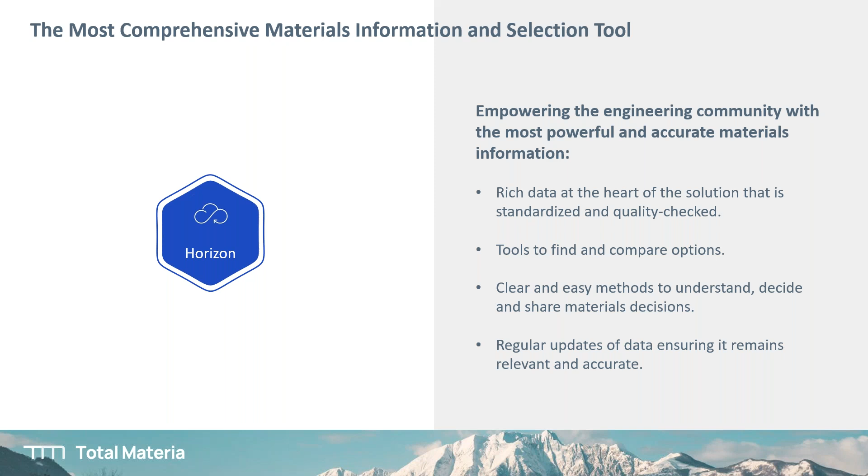You can find the equivalents of the materials across 80 different standards or producers and make clear decisions. Regular updates of data ensure it remains relevant and accurate. Global alternatives, reference data, and advanced properties will be provided.

Yeah, I was just answering a formability question from my user, and we have stress-strain curves, fatigue curves, a lot of advanced properties that you will be able to find, and approved reference data; create and share reports, material identification, 100,000, and we have a lot of

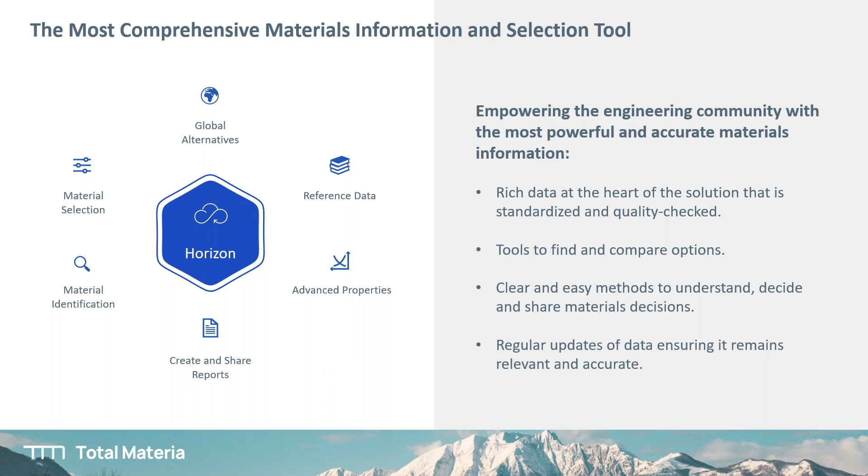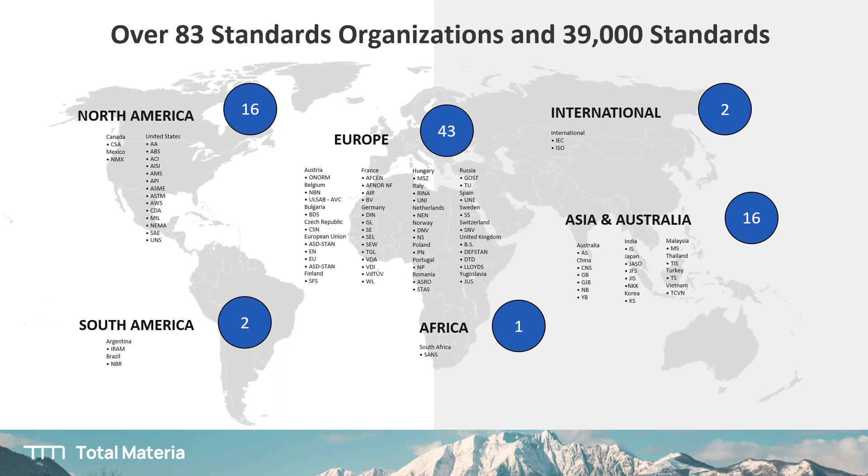the best material option, because it is covering over 80 standards organizations and 39,000 standards, especially for polymers, where you need a lot of different standards and a lot of different alternative materials. You will be able to find these materials according to their chemical composition and mechanical and physical properties, so you have a lot of alternatives and a lot of tools to compare and find the best local equivalent alternative material.

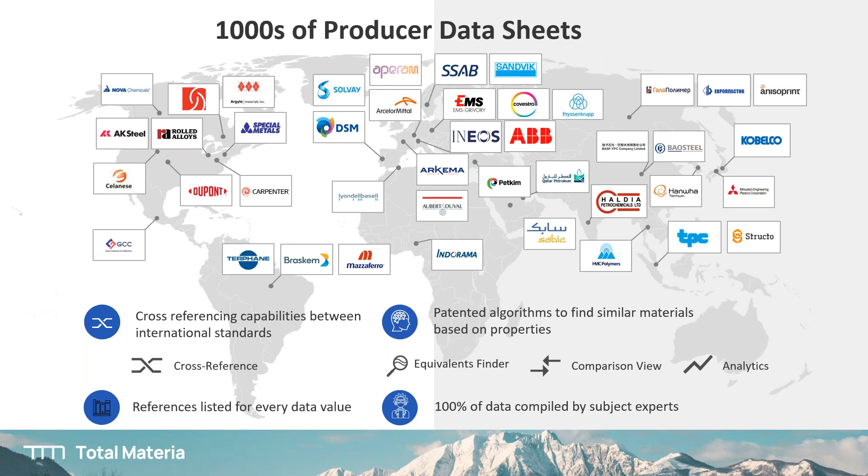This is how it looks. It is actually more and more user-friendly, updating every month, and each month our IT team is preparing some surprises for the users. It gets easier to use the Total Materia platform. And still, if you're struggling to find the information that you're looking for, you can always ask for technical support or free of charge training. Whatever you want to see, you can send your suggestions for us to develop the platform to be more user friendly.

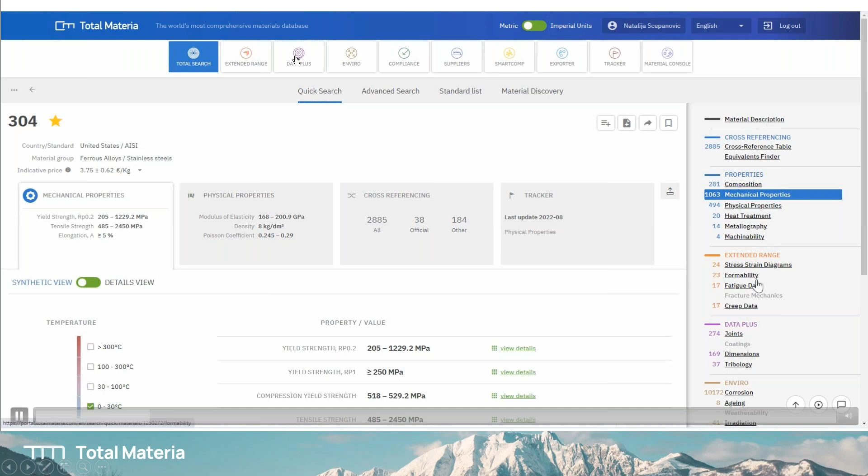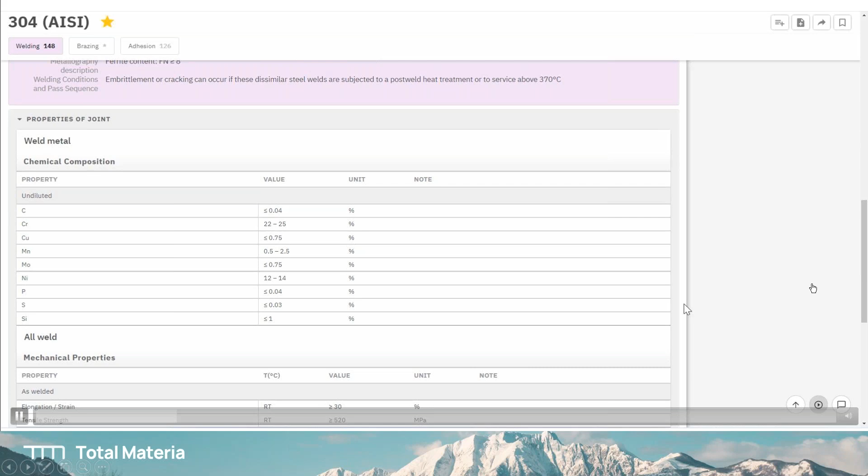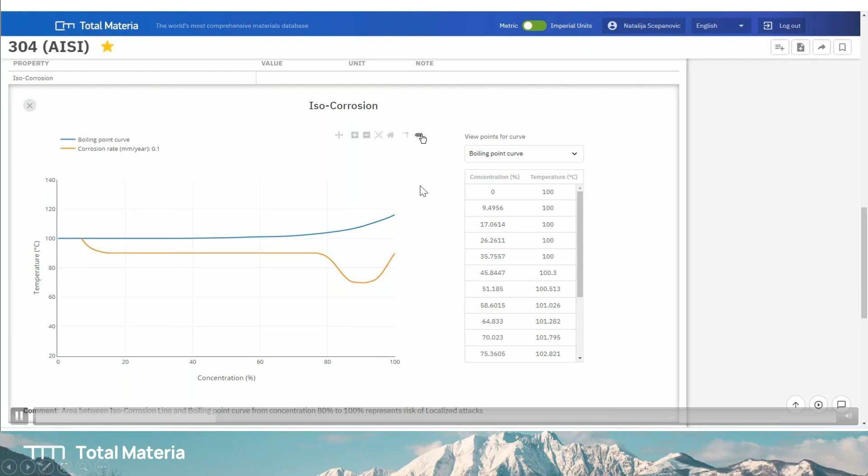This is the material card, for instance. On the right hand side, you can find mechanical and physical properties, supply information, a lot of stress-strain curves, joints information, chemical composition of the joints or mechanical properties, of course stress-life parameters, strain-life parameters, and as you can see, a lot of graphs, stress levels, iso-corrosion test results of the material, and temperature dependence information.

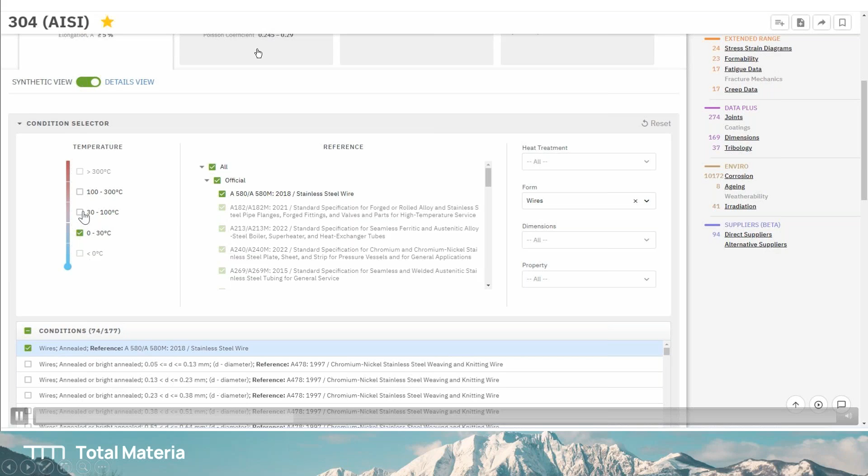All this material information from different standards is constantly updating; as I recently mentioned, every month we're looking for new materials and new material information. It is a very, very critical part of Total Materia. It makes the difference actually. The same material with a different heat treatment or different form will give you different mechanical or physical properties that you'll be able to find in Total Materia. That makes a huge difference for your estimations.

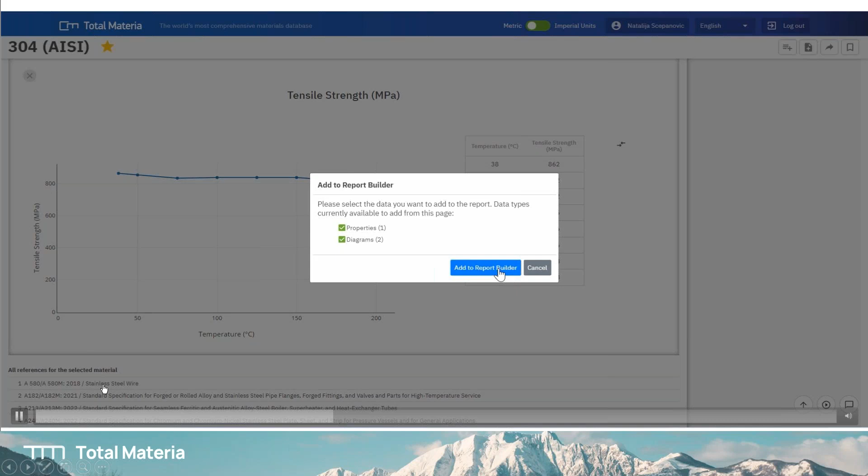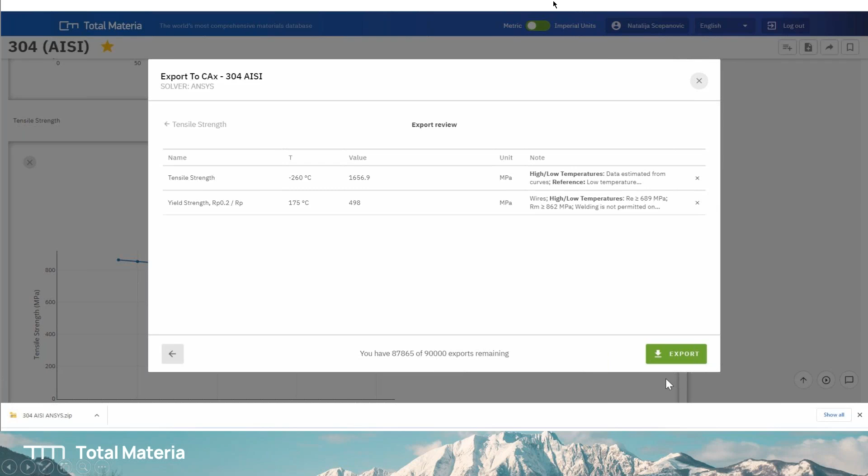As you can see, all references are below the material information, and you can compare the graphs. You can compare materials, and the same materials in different forms and different heat treated options. And with one click, for 28 different simulation tools, you can export these material cards and use this material information in your simulation software.

Here's where you can find alternative cross references of the material: identical, official, 100% same chemical composition, other sources, implicit materials, or Smart Cross will still help you to find the equivalent material. Here in the example, 304 standard material, cross referenced to Chinese GB standard material, as you can see the S30408 named material, or you can see different designations of the same material. We have 10 different alternatives.

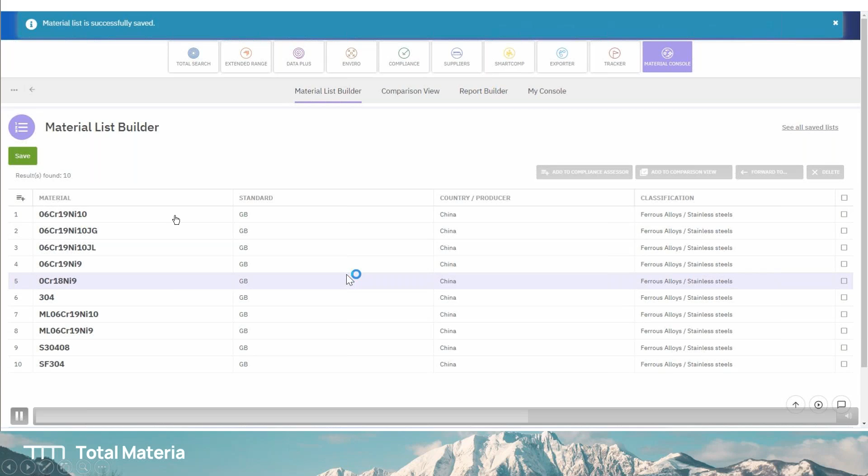We can create a material list of GB equivalents of 304, so you will be able to find which one of these materials has the best price according to your design. You can use these alternative materials.

Without hesitating, advanced search will give you another option. When you have a material, material to design is a different workflow, but when you have a design, you know the physical properties and mechanical durability information of this material, so you can make a search. You can add so many criteria here: yield strength, minimal tensile strength, impact strength, modulus of elasticity value that you want to have minimum in this material, so you can filter 500,000 down to 19. Now you have 19 alternative materials to use.

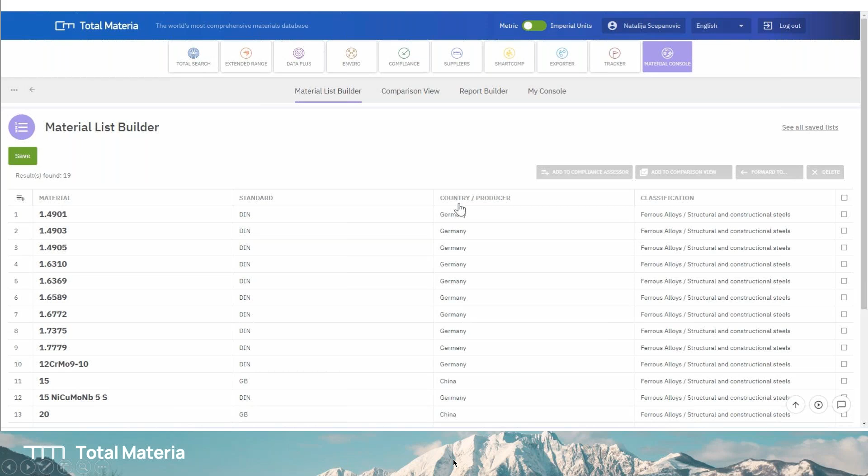Still, you can keep comparing these materials to see which one of these materials is the most suitable one for your design. It's very easy to use, and you can compare the materials side by side.

Of course, we have a question already. Can we use stress-strain directly in CAE? Of course, in the simulation softwares, there are stress-strain curves that you can add. I would like to show you maybe an example when I finish all this presentation, I will show you the details, because yes, we are connected to design and simulation, delivering reliable approved materials information to your simulation softwares. That makes the difference compared to generic material information.

You can combine with your PLM systems and sustainability tools; we are supporting right now 28 different formats, which means when you export this material card, I will show you actually, that material card will be able to be read by ANSYS or CATIA or Siemens NX or SolidWorks. And I would like to show you more detailed information about tools and integration to support your team.

Total Materia is not only for material specialists. This is also a very important tool for supply chain, and simulation specialists will be able to use all these material cards with confidence in your simulation softwares. And at manufacturing, you have a lot of detailed data, and the quality department will be able to control the material, if it's the right material that you purchased.

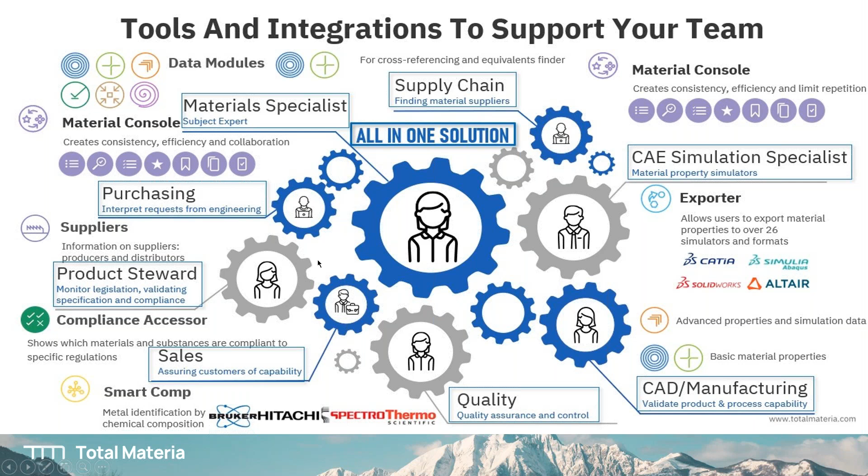And sales departments still have a lot of information about the material and the product, and the product steward will be able to know how to produce this material, for instance, mobility information, stress-strain curves, and so many details. And the department will always have more alternative information for different materials, different suppliers, different price information. Before we move to integrator, maybe it will be nice to show you the question that you asked.

The platform is remembering me. I'm just choosing a random material here, plus you can use the platform in different languages, any language you want. Let me show you an example. For instance, let's move to Romanian language. The whole platform will change to Romanian. Let's move to another language, Indian. The whole platform will change to Indian, let's say, or Thai, or any language you want. As you can see, this is the first option that you should consider, that it's easier to use your own language.

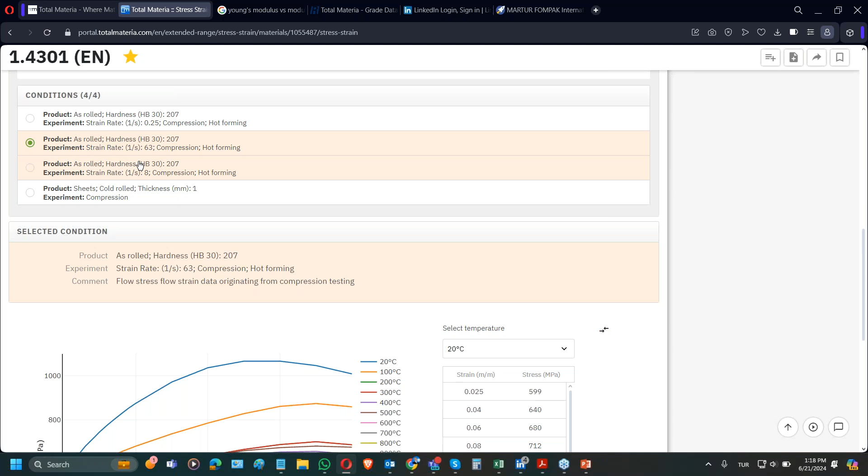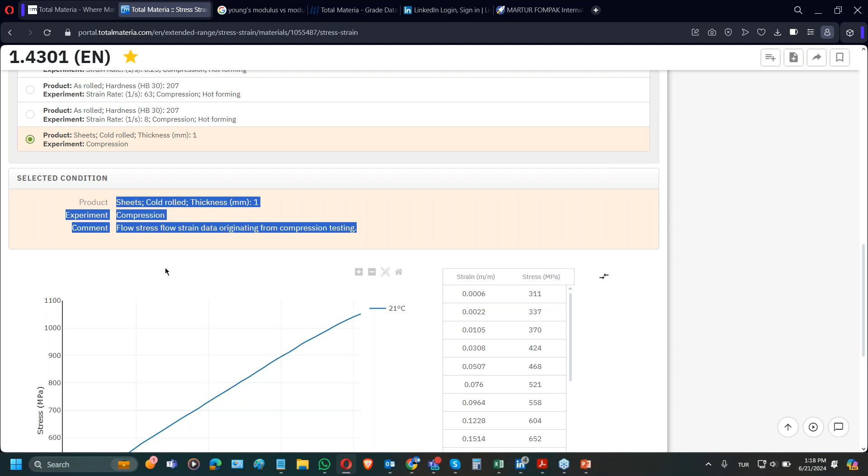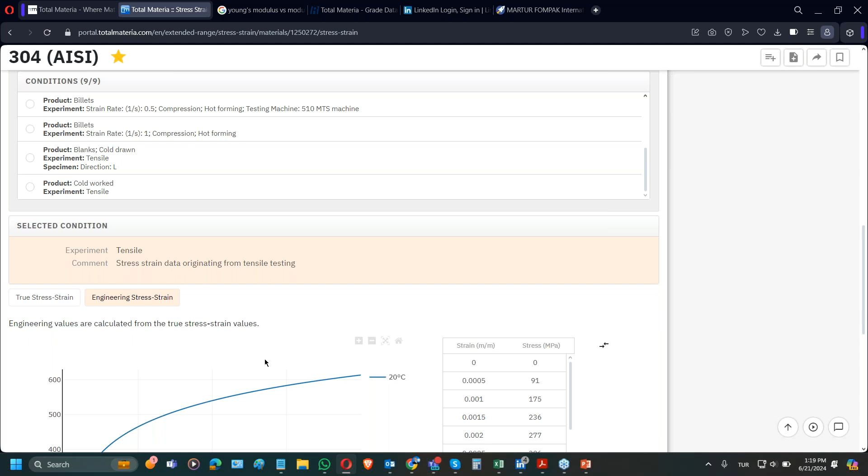And when I click material here, what you said, if we have any option to export the stress-strain curves, we have for this material, for instance, 4 different stress-strain curves. Sometimes some of our users are asking if this is engineering stress-strain or true stress-strain. These are 2 true stress-strains. If we have engineering stress-strain, we will always have the option here. I will give you another example, excuse me. And here you can see a lot of different stress-strain curves. We have true stress-strain by default always. And if we have engineering stress-strain, you're clicking and choosing the engineering stress-strain.

Still, you can copy this file, or let's say you want to export this file, all you need is to click here, export to simulation softwares. I hope you can see my platform, and you can choose Excel format, and when you choose them all, you have all. If you want only stress-strain diagrams, for instance, or modulus of elasticity, as an Excel file, in the next step you're choosing the right conditions. You can type here, let's say, sheet metal that you're looking for.

Maybe it will filter to 5, and you have to know that in military handbook references, we have 4, 5 different sheet metal options here. Okay, and all 12 references for this material give you different references. You're choosing one and then moving to the next step. You want to choose the stress-strain diagrams. All right, so when you choose it, you're moving next. But if this stress-strain is not the one that you're looking for, because it gives you whole details about the billets and product, you see the details, blanks, cold drawn, cold worked. You're just selecting the one you choose and moving to the next step.

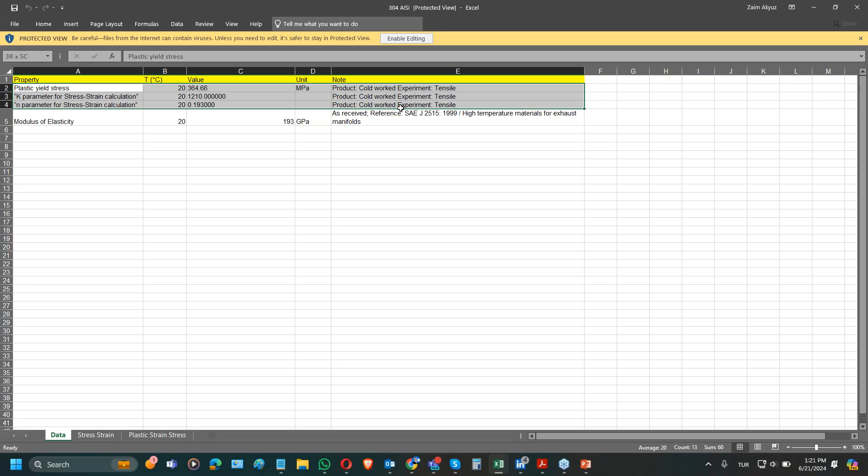And it gives you plastic stress-strain, plastic yield stress, and all these details you will be able to export as an Excel file, because we chose to export as an Excel file, remember. So this one will give you all these details, information for modulus of elasticity, stress-strain curves, and plastic stress-strain. See? So in case we want to export this data, the simulation software that you're using could be ANSYS. See, fatigue life, stress-strain diagrams only, let's say, or you can choose them all, of course.

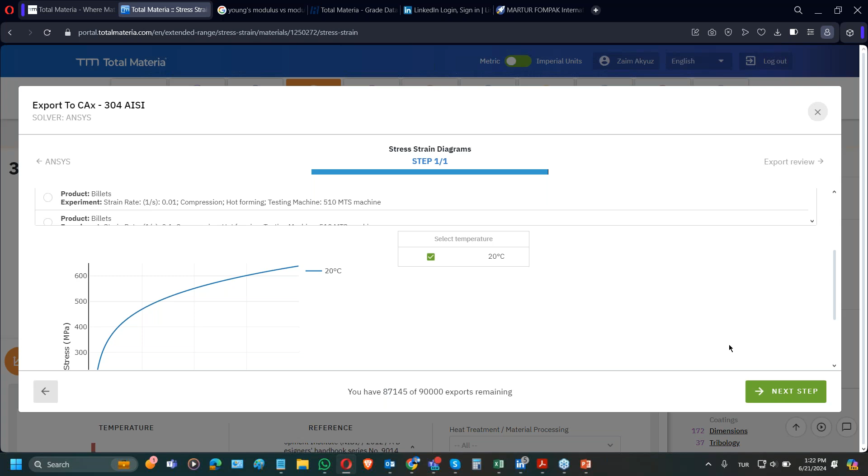And when I export this file, it will be able to be imported by ANSYS because it is going to be the XML file which ANSYS can read. And let's choose another one. Let's say LS-DYNA, okay, and yield strain information, and then this can be exported in MAT format.

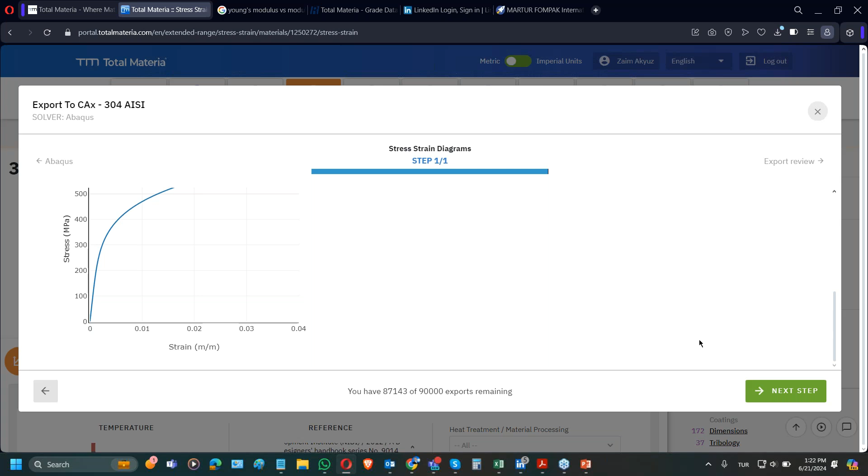See the difference? So whatever simulation you're using, it doesn't matter. It always gives you the right format for your simulation to read it. INP format, as you can see, for Abaqus. Still, we have 26 different options that you can choose from the list, either export as an Excel or XML file, or you're just basically choosing the right simulation that you want to use.

Simple as this. And we have formability information, high strain curves, formability first, bendability information, R factors, plus we're providing fatigue information. These are also very, very important. And strain life, stress life parameters. This is very important, the heat treatment of this material and the form of this material, specimen for the test, direction and loading conditions and stress ratio, especially high strain rates or cyclic fatigue data that you will be able to find.

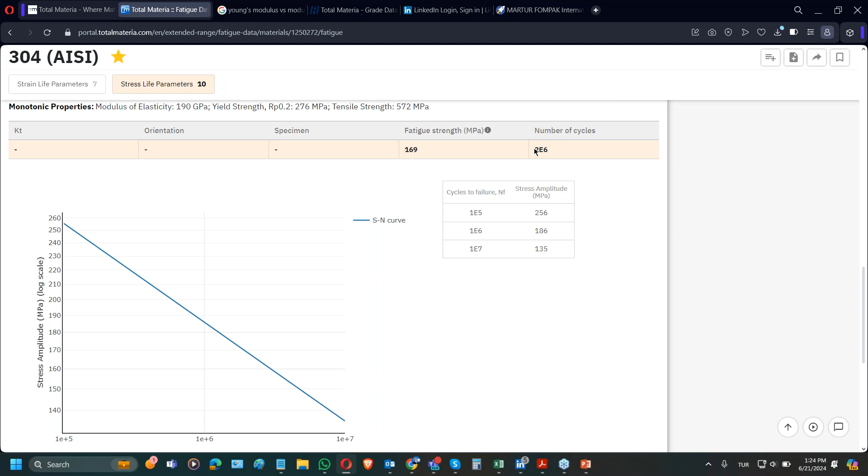Number of cycles, see, it's very valuable information. And here's the reference. And here is the product detail, experiment detail, and comments. The fatigue strength is obtained from strain life data at long life. This is a lot of information for thousands of materials. We have creep data. Okay, you want to join this material.

Welding, brazing, additional information, welding method, you're choosing the filter because we have a lot of welding information. Like, okay, I'm randomly choosing one and it's decreasing to 13 different options. Still, I have different electrode options according to the chemical composition or the mechanical properties that I want to achieve. You see, and with one click, you can have electrode information here. And if you want to keep searching, with one click, you're going back.

You can choose boiler alternatives and weld alternatives and 304 SAE. See, we have a lot of information for a lot of materials, dimensions and tolerances. These are very, very critical information. As you can see, once you click here, you'll be able to get all these dimensions and tolerances, information about strain, flaring test requirements, flange requirements, permitted variations. You see a lot of detailed information for suppliers and material that you want to purchase.

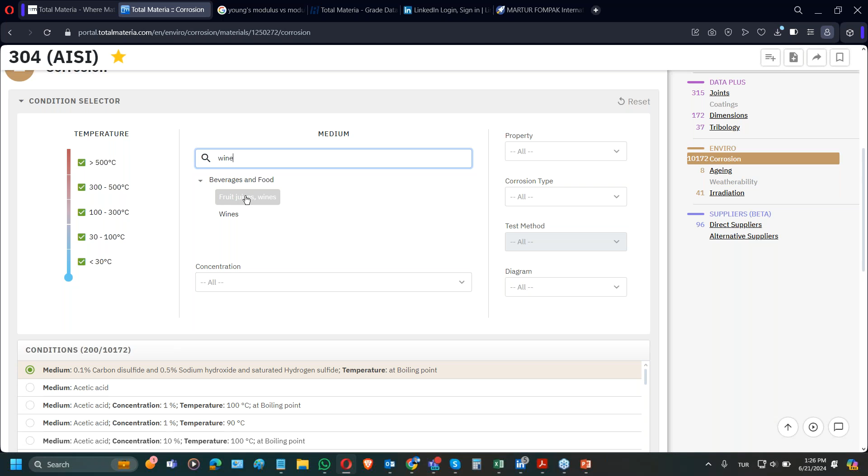And still, it's not just like that. We have tribologic information here. As you can see, 37 different tribologic conditions for this material. And corrosion information, 10,172 corrosion tests have been made for this material. So the property you want to choose, or just say salt water test, or sea water, or acid, or ketchup, or wine corrosion. Yeah, still we have fruit juice and wine corrosion tests of this material. We see 10,000 corrosion tests.

Aging information, when this material will lose its mechanical or physical conditions, irradiation, and if there's weatherability information, we'll put it here. And we have 96 different supplier alternatives. You need to choose the country that you're living in, and you'll be able to get the information where you can find this material. Okay, this is 304 from the United States. We are not living in the United States. Let's say we are in Europe or Asia. We want to see the same material alternatives.

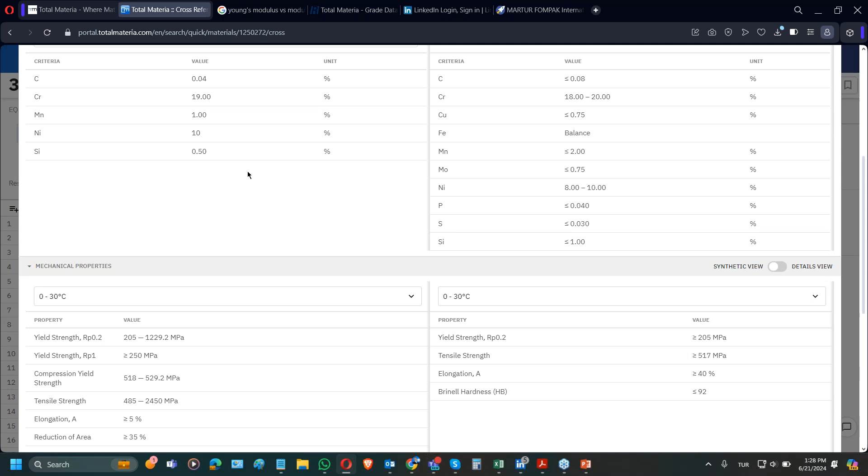Either we would like to go for specific proprietary information, like which producers are producing the same material as the 304 standard material. And this is the proprietary. Ulbrich Stainless Steels and Special Metals Incorporated is producing the same material. With one click, as you can see, we can compare the chemical composition, mechanical properties, and the physical properties of the material. We can save as a PDF with one click. See, so we can find alternatives.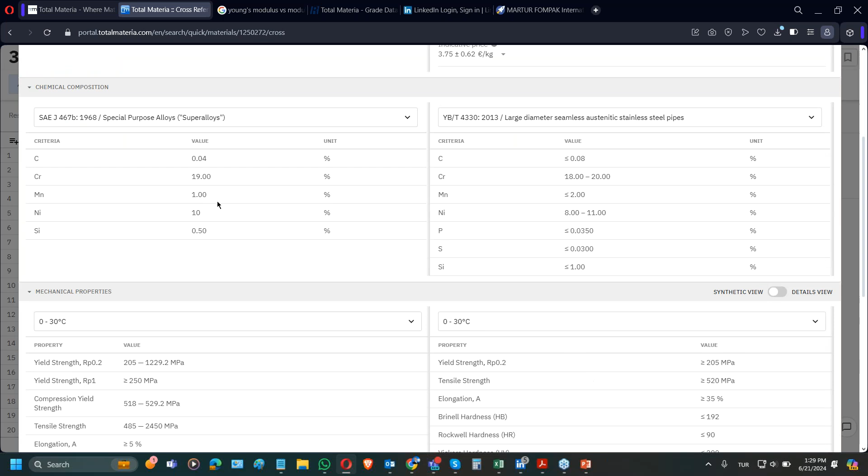We see the chemical compositions are 100% the same. And mechanical properties, yield strength, for instance, have the same value, and physical properties, and we can save this information to share with your suppliers, your manager. And the last update came for this material in April 2024. This is an example of how generally to use this material information.

But well, we have chemical composition, mechanical properties, 1,000 mechanical properties of this material. That means at elevated temperature, you have different mechanical properties, or if it's in minus, of course, you have different mechanical properties, as you can see.

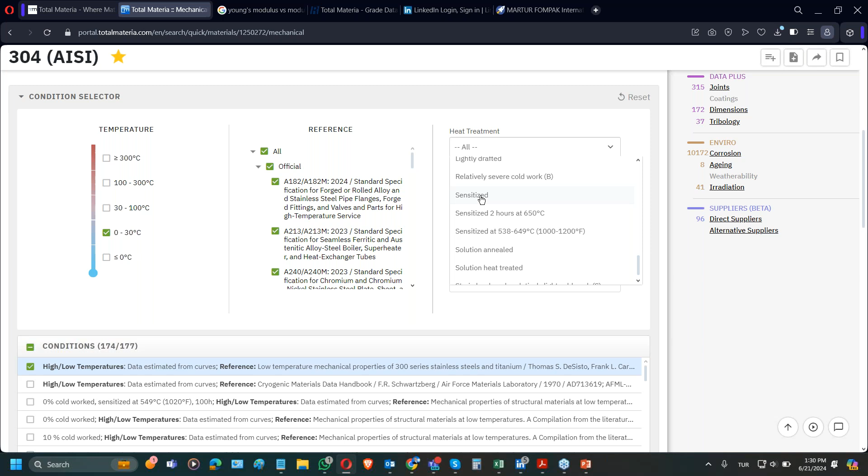And in detailed view, we'll be able to filter the different heat treatment options of this material. And if we click here, we'll find that in these heat treatment options we have one and only one condition, hardness of this material, and minus temperature to 0. See, hardness and graphics.

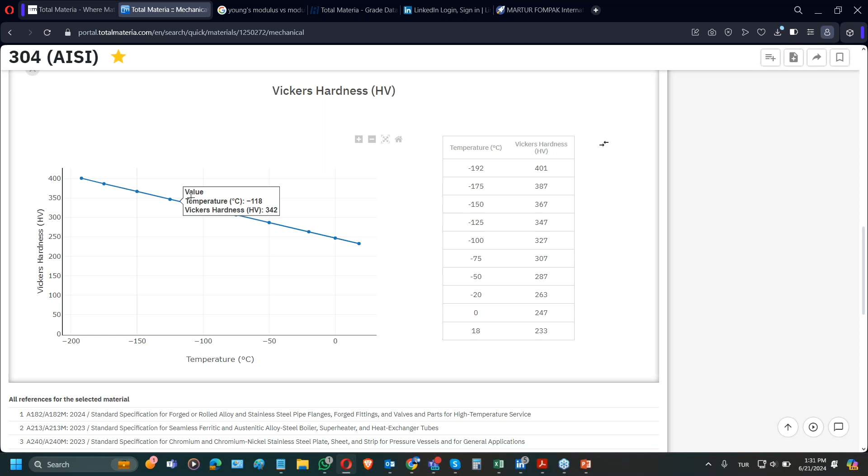And the same for physical properties. It's changing at minus or elevated temperatures normally. And when you want to see the detailed view, you'll be able to choose the different forms of this material. Of course, different forms of this material will give you different mechanical and physical properties. As you can see, the coefficient of thermal expansion is different for different conditions.

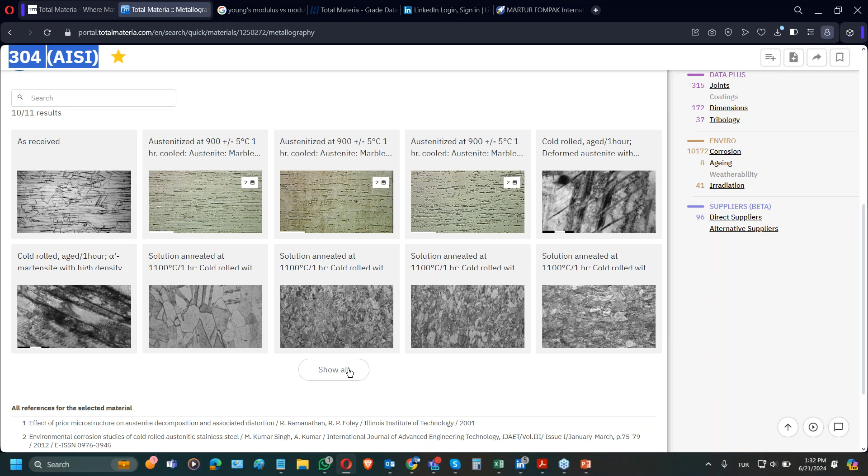As you can see, this is the same material, so when you use specific and accurate material information for your design and your simulation, you'll be able to find the detailed information here. Here's the heat treatment information of this material and metallographic information of this material. So detailed, so much information.

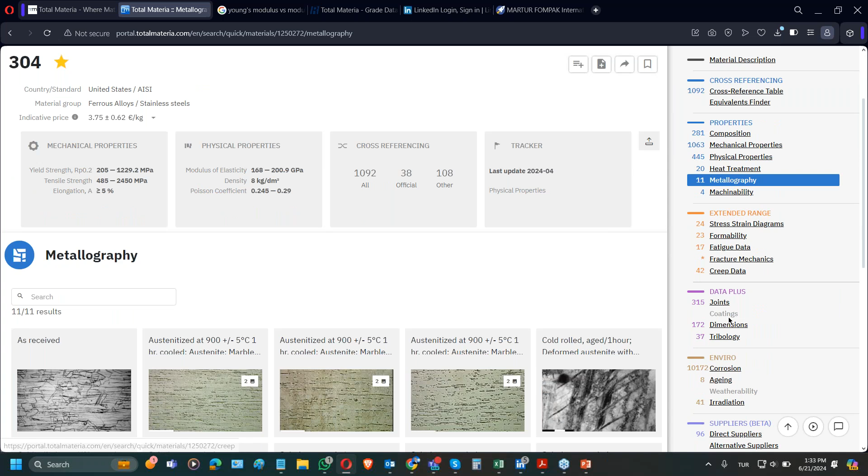But in metallography, let's say, if you want to see, here is the guided tours short video. It will explain what metallographic information we are providing and how you can find this information simply. As you can see, there are some screenshots and examples. Machinability, stress strain, joints, and so much information. I hope this gives you an answer to what Total Materia is and how to use Total Materia generally.

Beyond that, we have an Integrator solution, an editable version of Total Materia, because now with Integrator you will be able to add your test data into your material cards. You will be able to edit these material cards. You can either copy from the solution or you can use this test data to generate your own internal special material

laboratory. Let's say these are your materials. It looks exactly the same as Total Materia. Your materials, and you will still be able to reach the full version of Total Materia at the same time. So the legacy of materials, the whole process you're doing for the materials, the whole testing history of this material, you'll be able to save securely in Total Materia Integrator. You can see internal materials with one click. You'll see the composition, mechanical, physical properties, heat treatment information, or documents if you're using any special processes for this material.

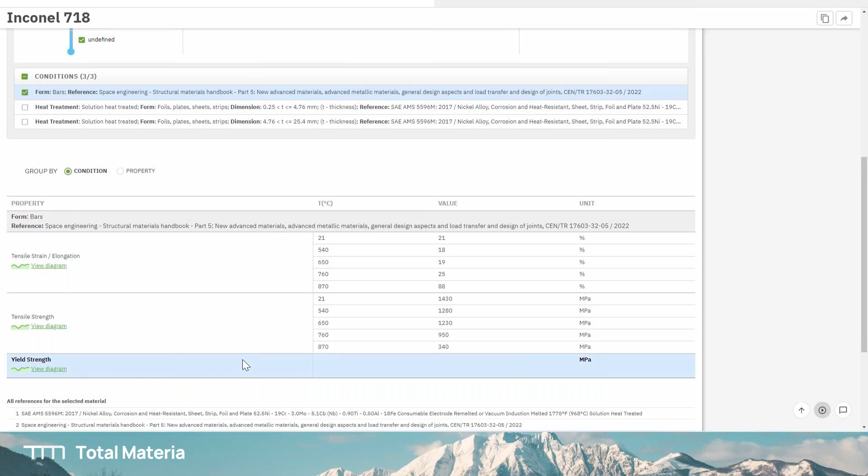Here are the descriptions of this documentation, compliance information. You'll be able to add and fully customize material. You can see this user is not allowed to use and view stress strain diagrams, for instance. Some users will be able to see the stress strain diagrams, but not chemical composition maybe. So you can set highly secured control: admin, power admin, and then user level.

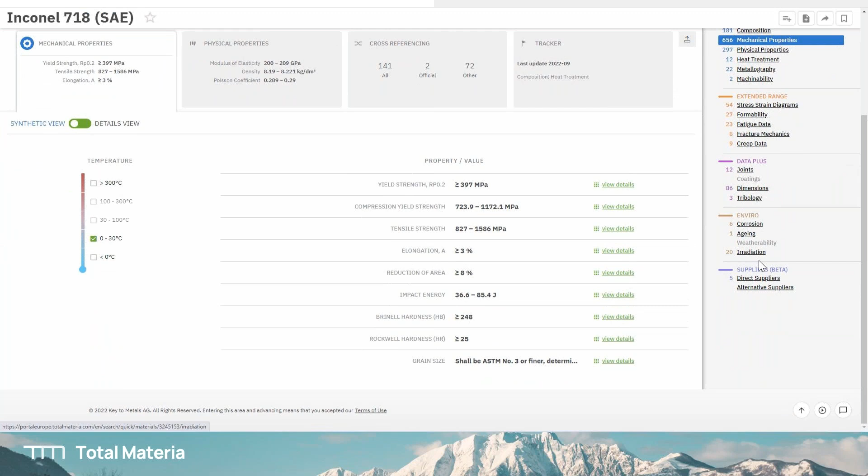You can make all the settings, and some of these power admins will be able to access Total Materia. Some of them only Integrator, internal materials maybe. So you can set these details. You can see Inconel 718 is updated from Total Materia. And when it's updated, when you have new information about this material, you can still copy it into your internal material database.

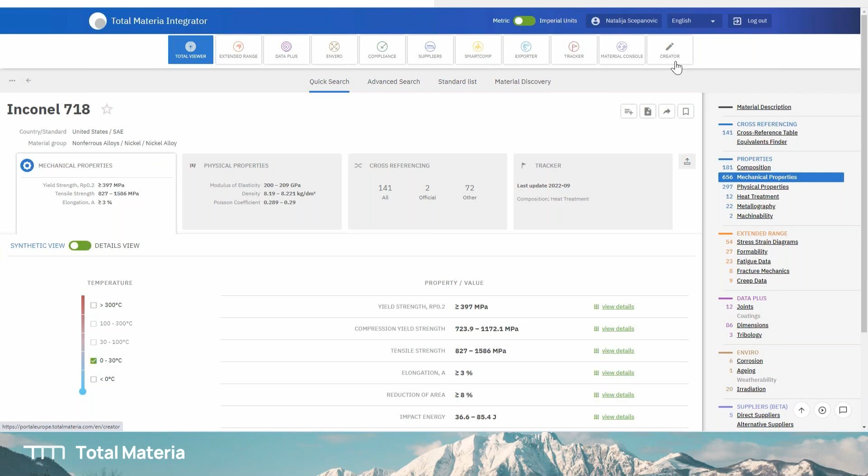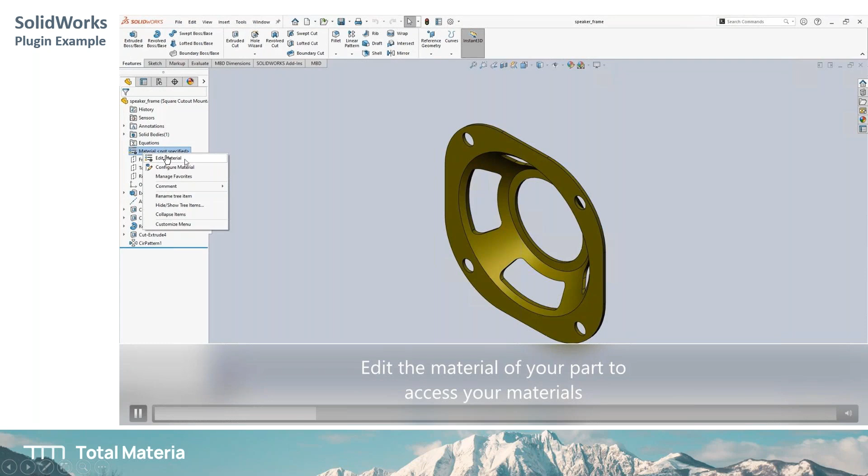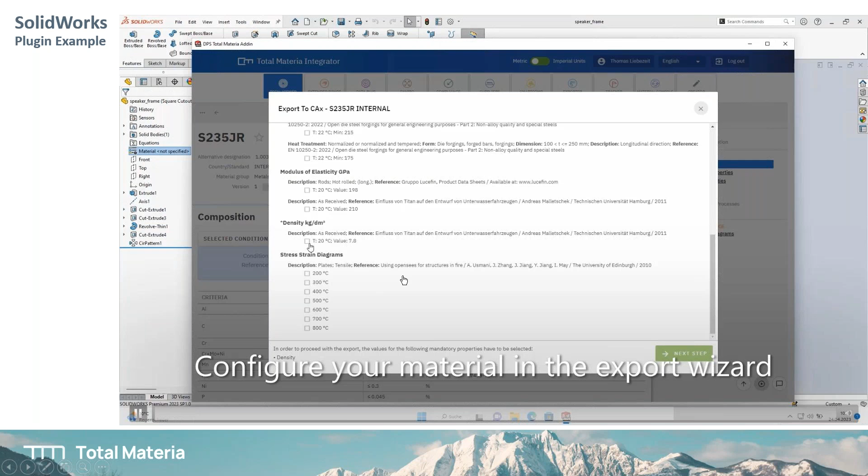And here's another example of how you can use Total Materia Integrator easier and faster for your simulations. This is on SolidWorks. When you choose and edit material information, you'll be able to reach your internal database where you filtered material data. When you add your own internal test data, now you have precise material information. You're still in SolidWorks, choosing what material information you want to export. With one click, now your design has precise material information, you see.

I mean, it's been 20, 25 years that we are online. And I think for the last 12, 13 years, you're able to use this material information with precision. Predictor: how Predictor is helping you. So far, you have 400,000 materials, 25 million records. Still, you want to see some stress-strain curves that don't exist; neither standards nor the producer's data sheet provide any material information like this, or we couldn't find any proper test data for this material.

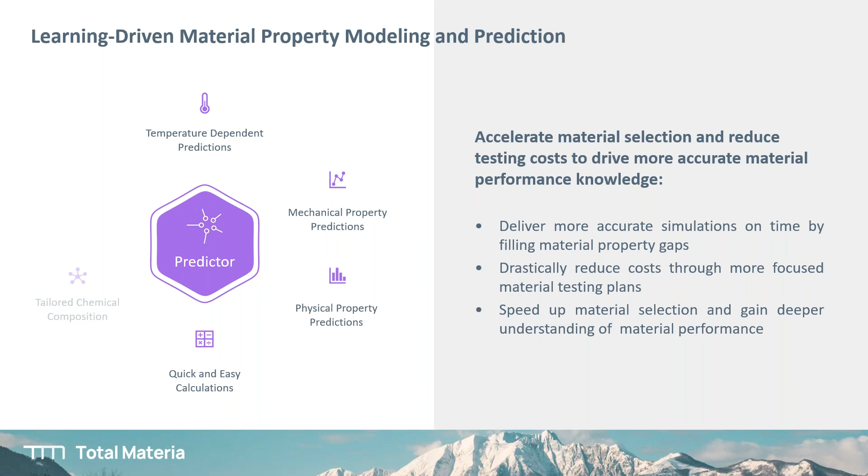Now you have Predictor, where you can simulate this testing procedure: temperature-dependent predictions, physical property predictions, stress curves, so much information that you can predict now. Quick and easy calculations, tailored composition, accurate predictions you can make.

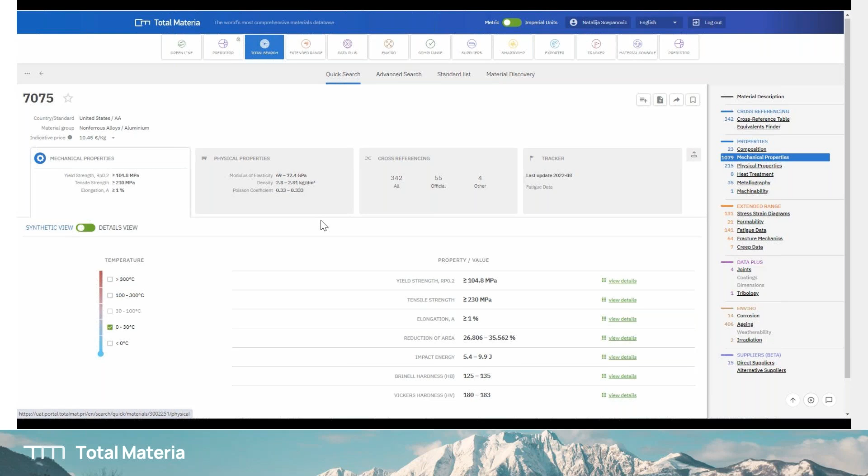Here's an example. We have had Smart Comp online since 2007, where you can add the chemical composition to find the material; we've been using this option for about a decade now. And here's another example. We have 7075 AA, but we want T8 heat-treated 7075 mechanical properties. We're clicking here. We have 1,079 mechanical properties here. What we are looking for is the yield strength of this material, but T8. We have a lot of different heat-treated materials' yield strength, but not T8.

So what are we going to do? Are we going to go testing? No, all you need is to make these predictions. 7075 AA, we are choosing from the list, and moving to the next step. We want the mechanical properties, yield strength, and T8 we're choosing here, dimensions that we're typing, product form, and test direction. We want to see minus 200 to maximum 300 degrees, and here are your predictions and the graphs.

I would like to show actually how it really looks. Here, any material designation you type, we'll be able to find what we want to see. We have hardness test predictions, Rockwell hardness, tensile strength, yield strength, density, heat capacity, also elasticity, Poisson coefficient, shear modulus that does not exist, but we want to simulate this test to get this material information, thermal conductivity, thermal expansion, volume resistivity, fatigue strength or stress-strain curves. I'm choosing this, and give me the stress-strain curves.

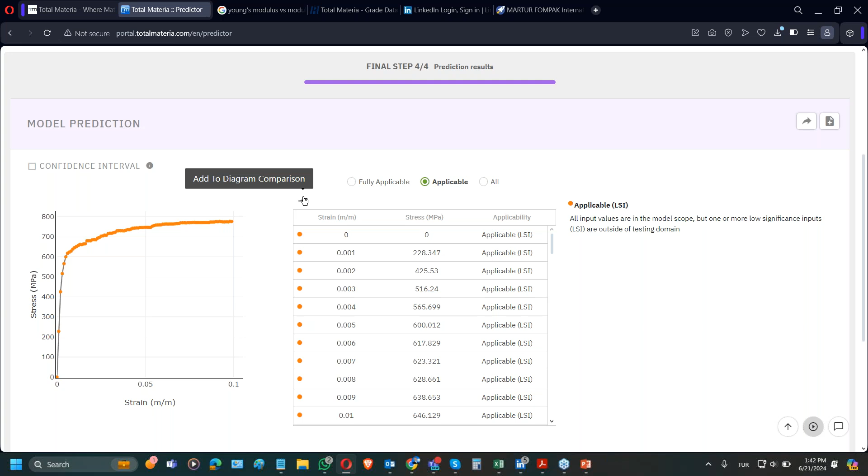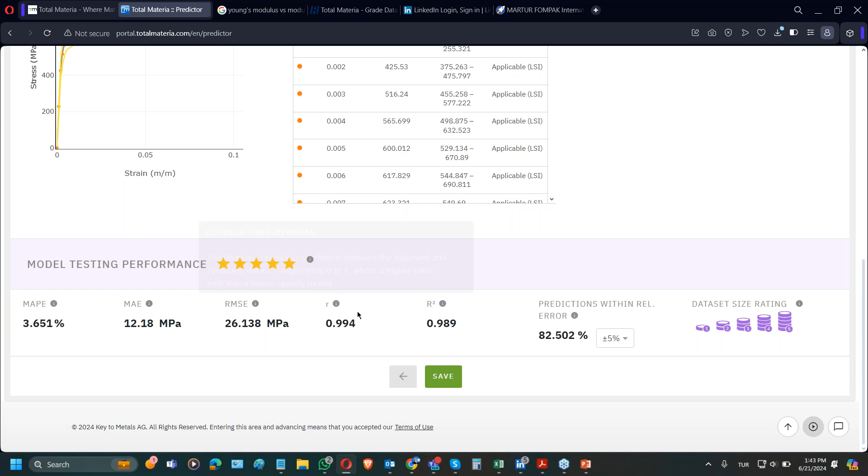And yield strength. We have some information, and maximum strain. Let's choose 0.1. Select here. Here are our stress-strain curves. Add this comparison. We have confidence interval options. See, we have all this information. We can save this data.

See, and then what I'm doing is moving backward. Here's the material information. And then I can change maybe the thickness to 30 only. Okay. And make new estimations.

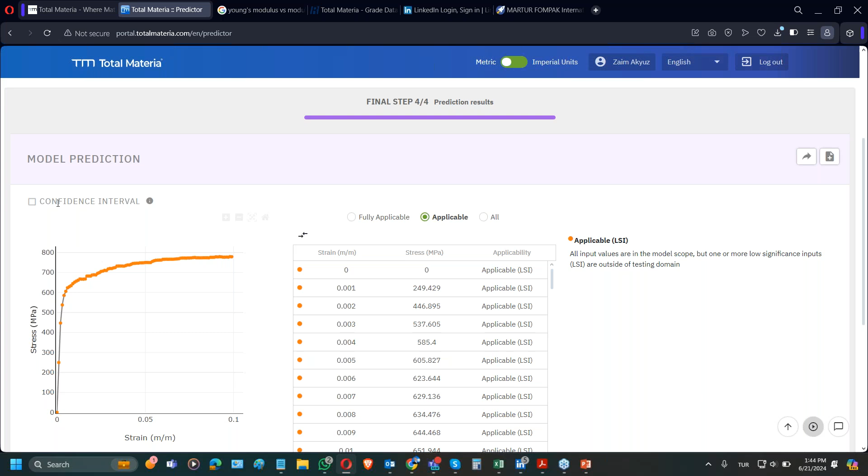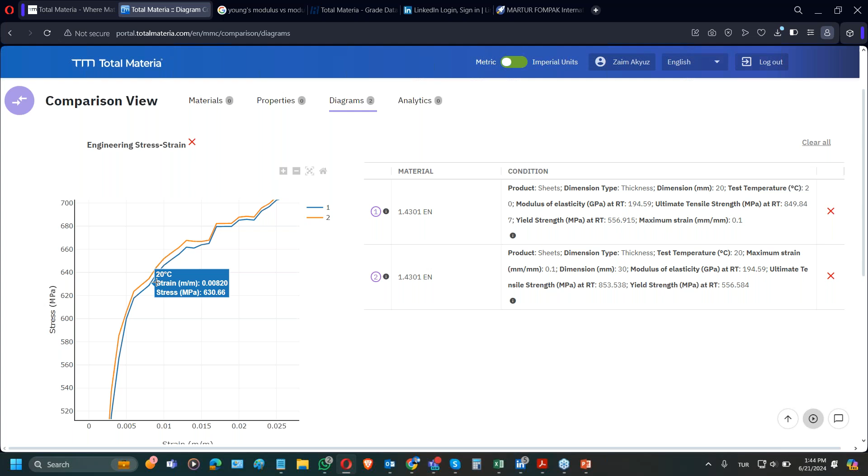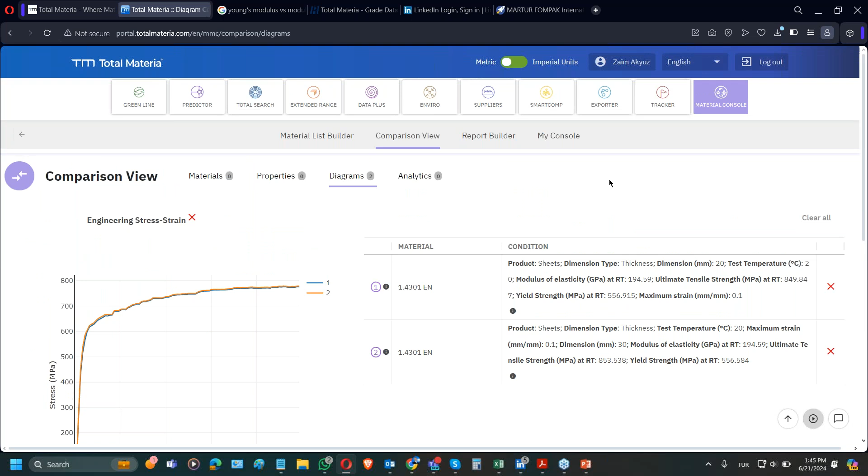It's the same, and I'm making this test simulation, and I'm comparing these two diagrams. All the difference is 20 millimeters to 30 millimeters. And here's the difference in the stress-strain. Very, very small difference, but it's critical. See? You know what I mean? This is an amazing tool with which you can make a lot of estimations, save these graphs, and see the difference for the same material at different thicknesses. I hope it will be helpful for you.

And the next step is compliance and sustainability, Total Materia green line: achieving regulatory compliance with industry standards, minimizing delays and recalls through supply chain efficiency, redefining material selection with alternatives, and up-to-date information for your bill of materials. Sometimes for vehicles, you need to check tens of thousands of materials to see which one is really compliant, and if we have any greener alternatives.

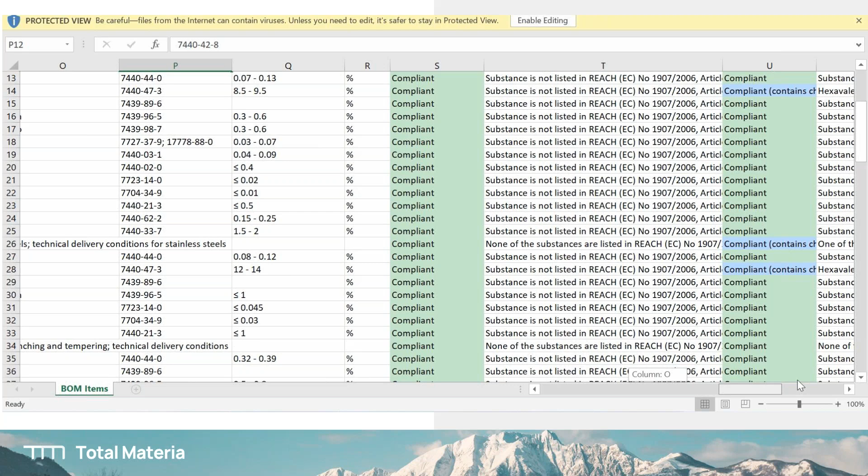See, this is very critical information; you need up-to-date information for this whole material list, a bill of materials that you can upload from your computer, checked against up to 5 different regulations at the same time. You can check the same bill of materials to see which materials are compliant according to up to 5 regulations at once, so the product you produce can go to the United States. But if it's not compliant, some of these materials you'd better not send to the United States, because according to California Proposition 65, it's not compliant.

Please don't. You'll be in trouble. So better don't send this product back to the United States. It's okay to send it to the European Union or Asia and anywhere you want. So this is how it goes.

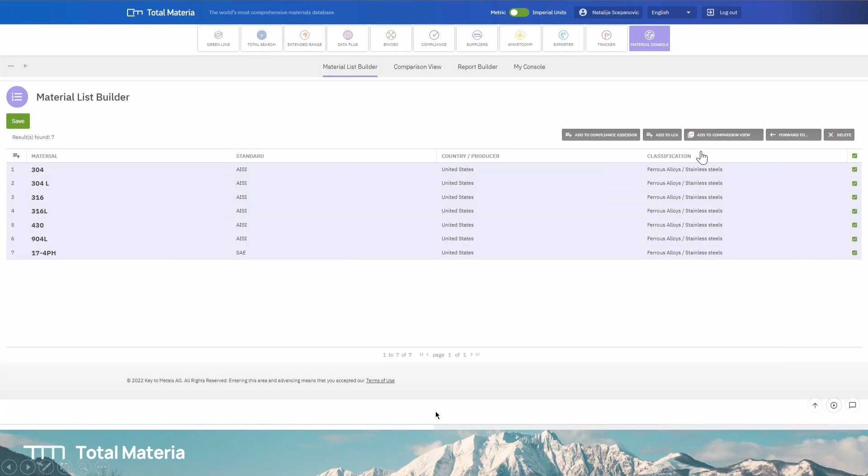Also, we have the LCA tool: ecosystem, human health and natural resources, where you can find different indicators for the materials that you're using for production, how they affect the ecosystem, human health or natural resources. And this is also the first step to calculate your carbon footprint, because we just choose climate change or energy demand, let's say, and this first step of the calculation will give you the general effect.

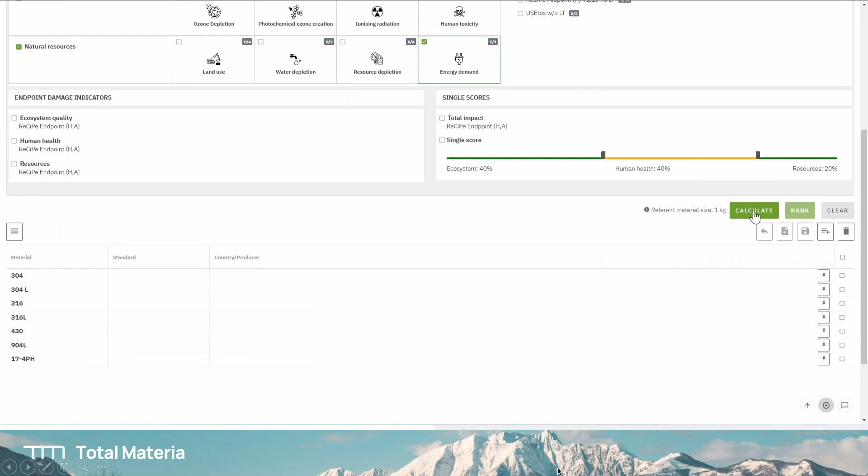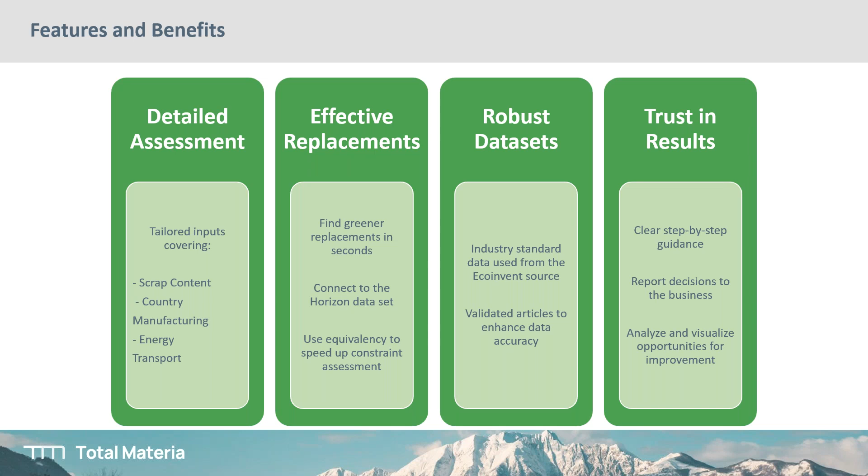And when you choose one material here, you see which of these materials are greener, which have more effect on the environment or more energy demand for production. And with the carbon footprint module already launched, you'll be able to see your own carbon footprint and calculate a detailed assessment: scrap content, country of manufacturing, energy demand for transporting, and you can easily find the greener one, local alternatives, or make all these calculations with precision.

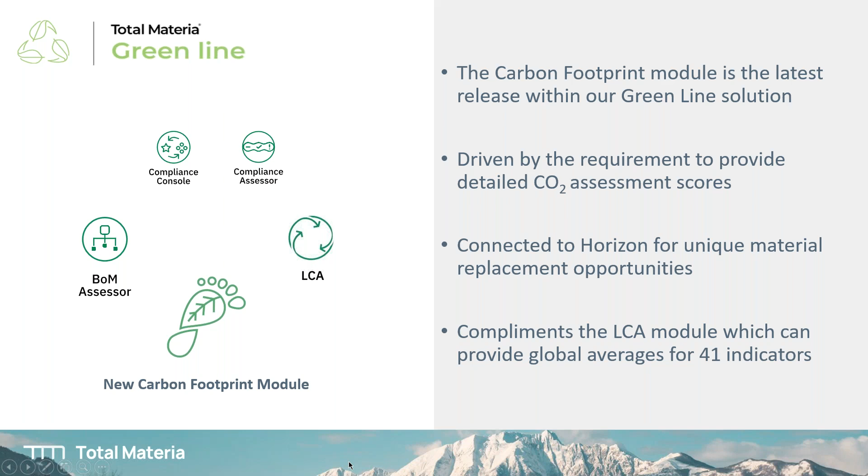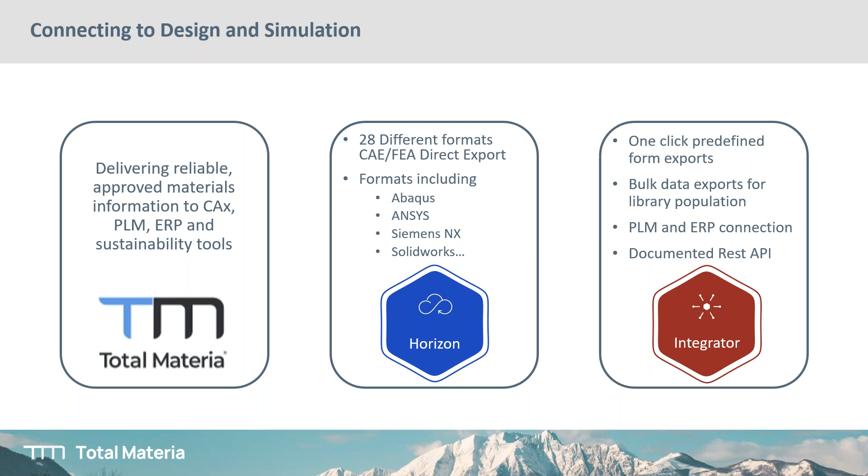So carbon footprint, life cycle assessment, compliance assessor, compliance console, and bill of materials assessor are very, very important, critical tools. You can combine all this materials information. It's useful for different engineering departments, different departments of your company, of course. Simulations are the starting point. We are connecting simulation tools and estimations to the real world with precision, because you will be able to find precise material information inside the tool.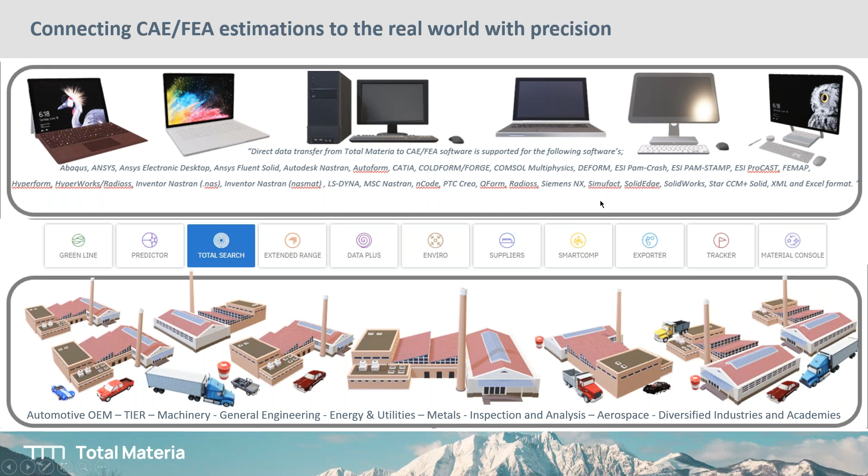So this digital world estimation is not always real. So as you make precise estimations here in the digital world and the actual production part, your colleagues will be happier for sure, because these estimations are very, very important and time saving. As much as you make precise estimations in the automotive industry, machinery, general engineering, energy, utilities, metals, inspection and analysis, aerospace, diverse industries and academia that have been using Total Materia for years.